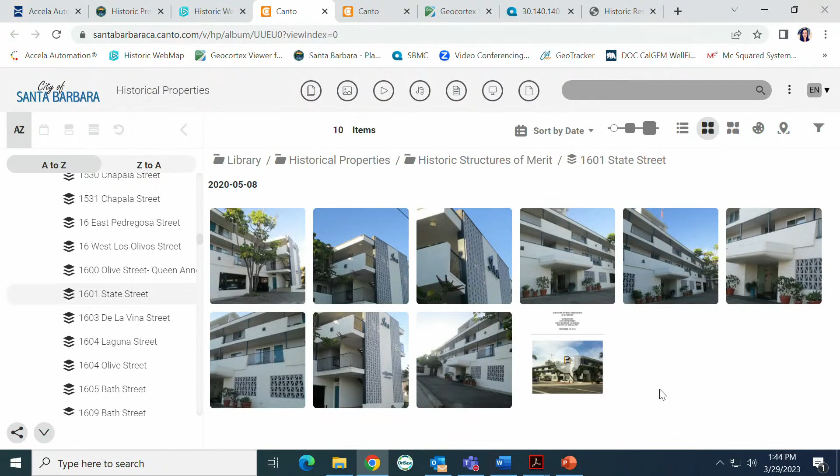Can you point out where that is on the map? It should be right across the street, there, right across the street. Got it. So here's the site, it's one of those El Pueblo Viejo buildings, going in the Mediterranean style with some transitioning styles surrounding it. That building right there, is that the Edwards and Plunkett courtyard building? Yes, I think it was built in 1927.

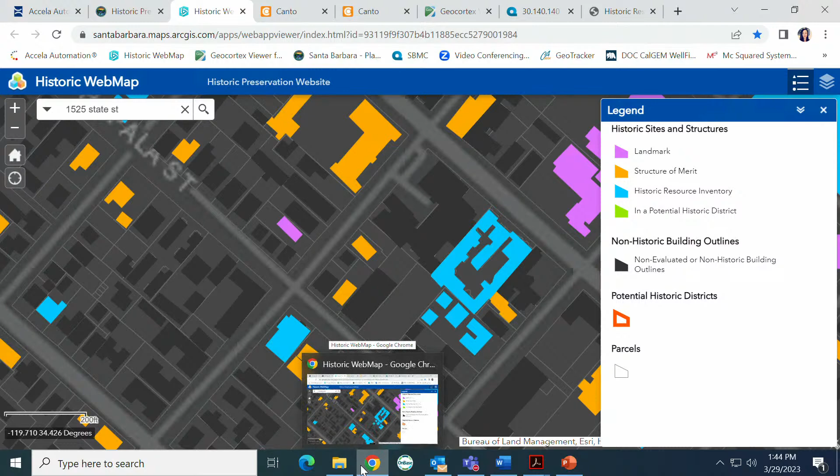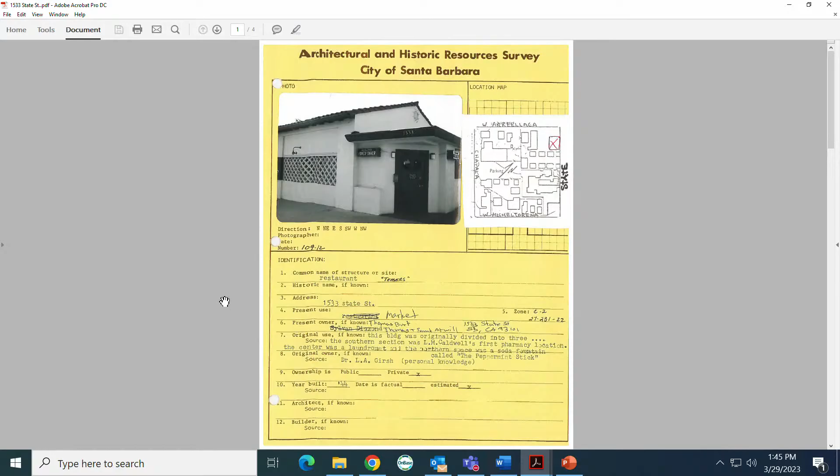We also have, for the applicants and the public, the historic resource design guidelines on infill design that you can use. The Cantwell building itself has been so altered since it was constructed, even since the 1978 survey—this is what it looked like in 1978—it doesn't qualify as historic. So that should set the stage for you on historic concerns. If you have any others, let Heidi know.

May I ask a question? What's that down from the hairdressing salon that was attached to the El Prado? I think it's that hot pink right there. Didn't we have that in front of us? That's the Mid-Century Modern by Lutah Riggs. Yeah, okay, thank you. So you kind of have Mid-Century, Victorian, and Spanish Colonial all on that block. There it is, thank you.

Maybe we should go to the photo board, and I think staff already showed some of the historic structures. The existing site is on the corner of Arrellaga Street and State Street. It is the Cantwell's Market. The current building has 2 one-story buildings there. One is the Cantwell's Market, the other is a one-story commercial project that's currently, I believe, a dance studio, and it's had different tenants over the years. Primarily, most of the site is the parking lot.

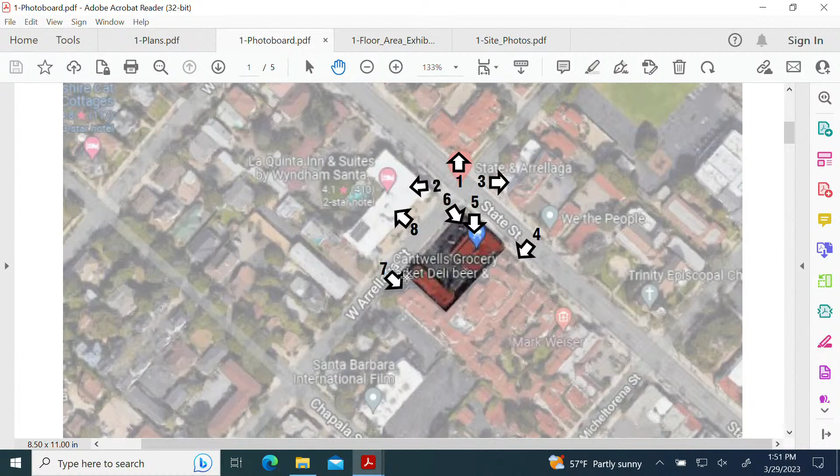There's 2 driveways in and out. As I said, it's right up against the property line. There's 2 buildings, so it's up against the adjacent building that's sort of wrapped around us. The design, maybe we go quickly to the photos that actually show it, and I'll move on to our concept.

So there you can see this is a view of the hotel across the street, the commercial building diagonally across the street, and this shows the Cantwell's Market. It's sort of an interesting building, but due to its configuration, it's shuttered at night. It's not a very street-friendly project as we think a good pedestrian project should be, and that's something we've taken under serious consideration in the design.

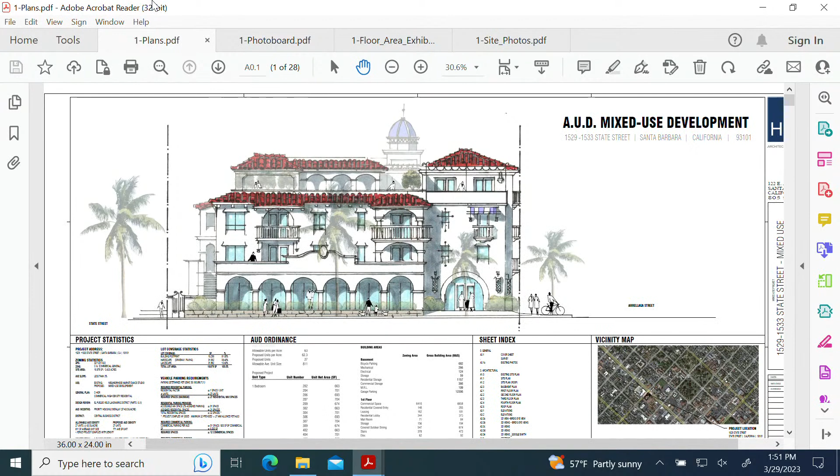We can go maybe now to our site plan, Carl, or even the ground floor plan. All right, I want you to go to the first floor. That's the first floor plan.

So our design, what we felt was very important, and it relates not just to the architecture, but the pedestrian activity in this neighborhood, which goes sort of silent at night, was to have a very pedestrian orientation. We have an 800-plus square foot corner courtyard, and I know because I'm always walking there to Cantwell's, and people are diagonally cutting through the existing parking lot.

We're proposing to move the dining. Right now, there's some outdoor dining, it's almost in the parking lot, except for a little curb stop. It's a little scary sometimes eating there. We propose an arcade that would include some outdoor dining area and enhance the streetscape.

And also, there's an existing sandstone wall. As the State Street slopes down, we are going to continue that existing sandstone wall with the landscaping that Courtney can address to sort of create a little bit of buffer. It's a fine balance between street pedestrian activity and also security issues.

In addition, as we turn the corner along Arrellaga Street, we've set the building back. Right now, there's no landscaping. We have set it back 6 feet with landscaping, and then once again, we have some outdoor arcades. So we're constantly trying to terrace this building back and as best we can create a one-story, very pedestrian-friendly environment. I'll show you later on the elevations at total transparency, arcades, glass openings all around that courtyard, no blocked up walls.

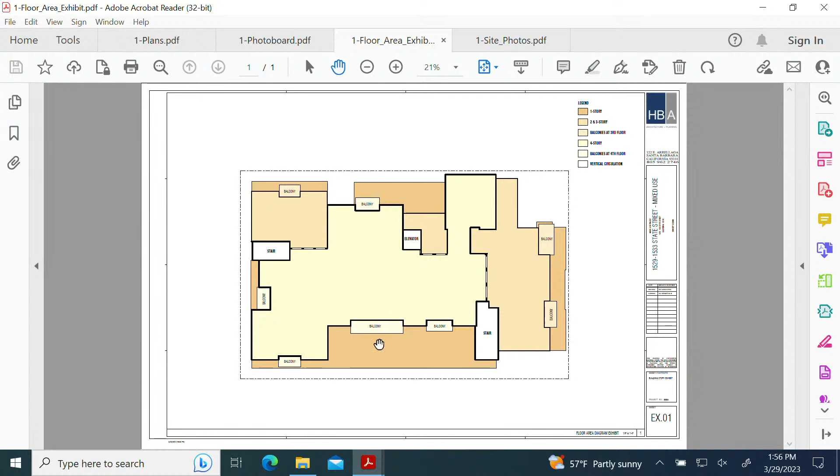We did receive some comments. I know there are people from the neighbors here, and we are going to take that under consideration. I feel there's definitely room for us to work with you to address some of your concerns. We have flexibility within the footprint, and I know Pradeep and Pranav want to be good neighbors - we're really coming in here for the first bit of comments.

If we turn to the elevations - oh, by the way, I want to give Courtney some time at the end because we are improving the landscaping, so I'll go quick. We have landscaping along the edge, let's go to some of the elevations, and the 3D sheet that shows some of the 3D massing views might be best - it shows several views of our preliminary model.

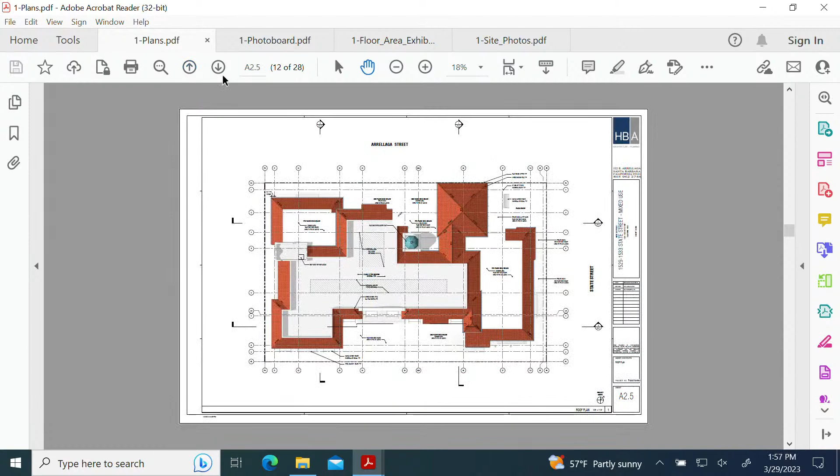You can see here it shows the plaza. What's interesting - our client said let's not just have the sidewalk wrap the plaza, let's bring the pavers all the way out to the corner so it gives it more of a civic public space, not artificially surrounded by the sidewalk. You can see the arcade on the street side, the step back in the building, the rooftop terraces. We kept 3-story elements around this entry courtyard, and you can see where we've stepped it back.

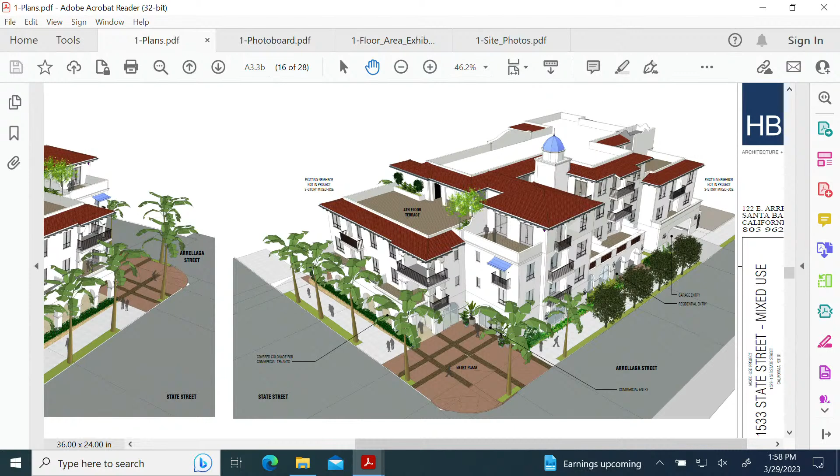I'll let Courtney talk a little about the landscaping, because right now with the parking lot along Arrellaga Street and the boarded up windows, it's not a very pedestrian-friendly environment there. We also have an outdoor tile stair that can come up to the 2nd floor, so there's pedestrian connection, not just through the lobby on Arrellaga Street, but some connectivity along State Street.

As I mentioned, this is early in the process. I'm going to give Courtney a few minutes here to talk about the landscape. As I said, we're here to hear your comments, concerns, questions, so that we can go back to the proverbial drawing board and hopefully come back with a really acceptable response.

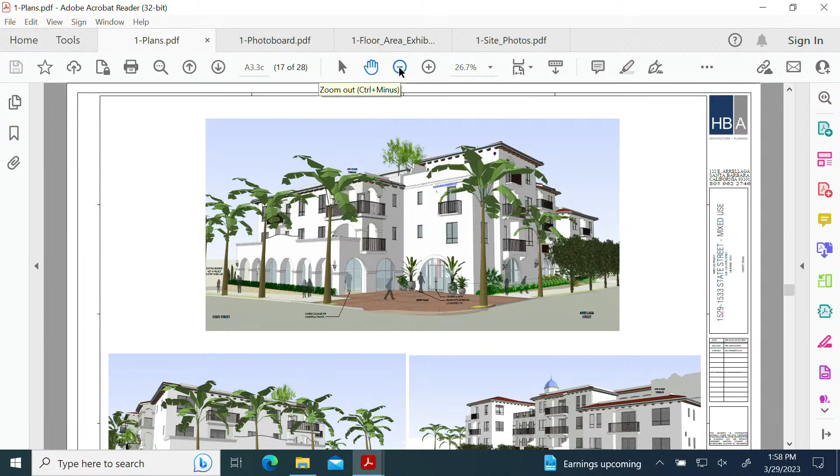If we could go to the tree protection plan, the first page in our sheet. I'll try to be brief. We have, I think, 9 existing trees on the property.

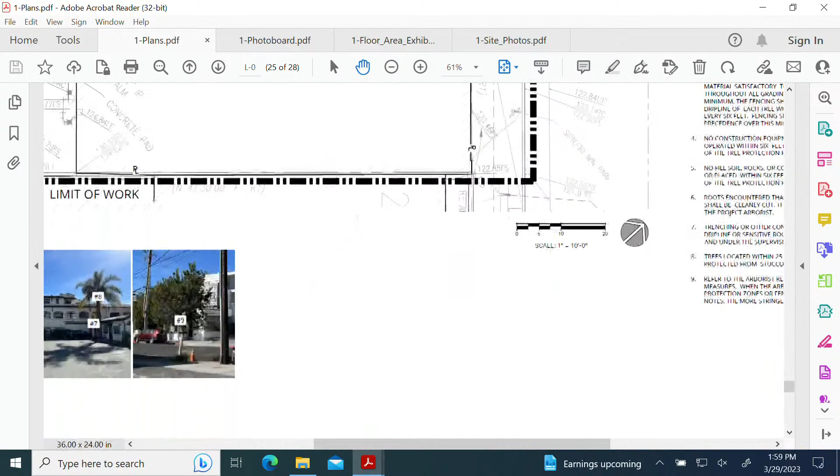Most of them are street trees, so we'll be keeping all of those. There's one pretty poor-looking firewheel currently on Arrellaga that we'll have to remove for our driveway, but otherwise we're keeping all of the street trees and adding new ones along Arrellaga. There are also a few existing queen palms between the buildings, one of which we'll remove, and the other two we're hoping to relocate. They're quite nice, maybe 12 feet tall or so.

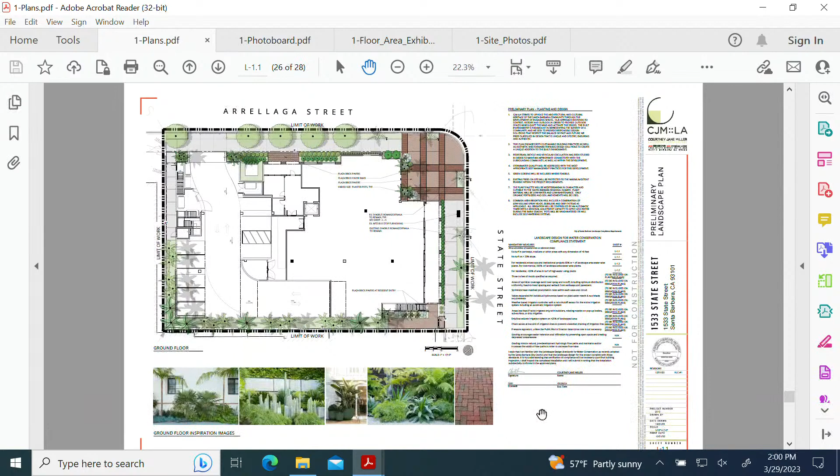Next page. As Jay mentioned, we're really happy about the amount of space we have on the corner there, so we're trying to pull in different brick patterning and keep it open and friendly, leading people into the front door. Since this part of the property is over structure, instead of raised planters we liked the idea of having a massive group of pots. We have some imagery at the bottom that speaks to that, though not quite exactly. Around the south and west sides of the building we have about 10 feet between the building and the property line, and within that space we're hoping to have a lot of layering with different palm trees and narrow, taller tree species to help address the adjacency with the neighbors.

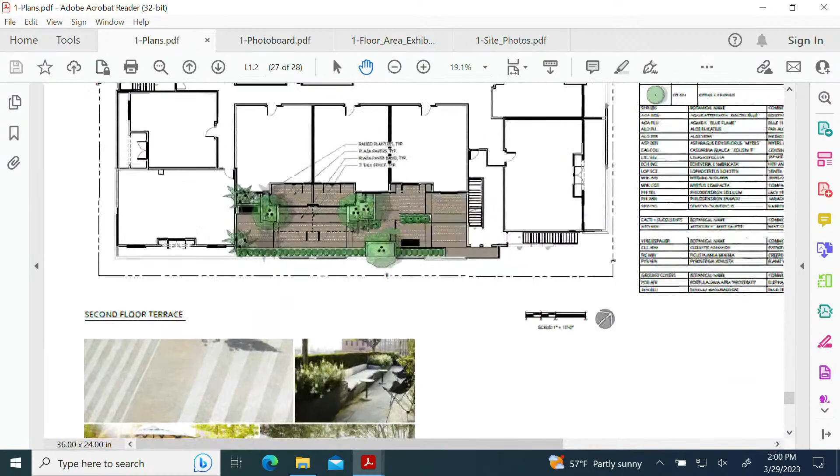Next page. Second floor terrace—this is a fun one. We kind of have a different personality for each terrace on the different floors. This one we wanted to feel a lot more like a garden, so the idea is to wrap it with hedges along the south property line and have built-in planters. These are mostly private areas on this floor.

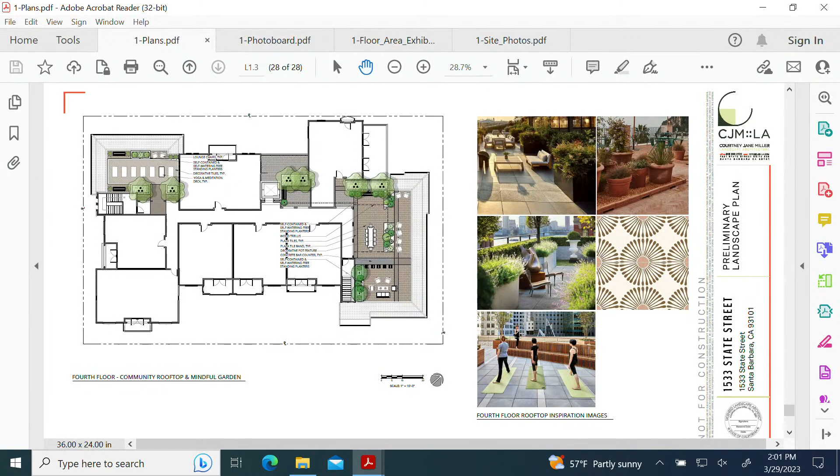Next page. Fourth floor—we have our community terrace plan overlooking State Street, and we have some space to work with there, so we're hoping this really feels like a community space. We have a communal table and various ideas around seating. The terrace on the upper left-hand side we're hoping will be more like a space for mindfulness, a quieter space—so yoga, just kind of a beautiful garden setting.

And I think that concludes my part of the presentation. If there's anything else, I look forward to your comments. I guess I have a minute 30 to go.

As far as the architectural articulation, as I said, we want to use traditional arcades and archways on the ground floor. We're still evolving the design, but the concept is to have a very traditional building within the guidelines in terms of the balconies, the wrought iron work, the tile work. Around the entry courtyard we maintained it at 3 stories, and we think there's an opportunity there not to be symmetrical, but to have a more playful articulation of the facade.

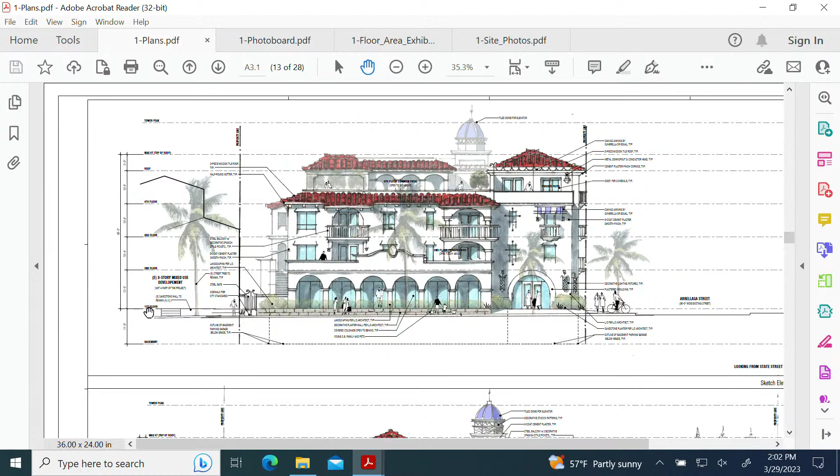On the upper floor, what you're seeing on the top floor, that arcade is strictly just a walkway to get to the exit stair. It's set back 30 feet, so in reality lots of this would not be visible from eye level. And there you can see that's a stone wall that's really an extension of the existing stone wall that continues down State Street.

The rear of the building—right now the Cantwell's building is right up against the property line, so that's primarily parking in the back. Rather than building right up on the property line, where right now there's trash enclosures and some mechanical things, we do want to work with Courtney to create a much nicer landscape perimeter around this building, not property line to property line.

You can see here, once again, the 3D showing the stepping and the breakup. We didn't want a box. Obviously as a trade-off we do have some portions that are 4 stories, but we had the ability to work within that massing to move things around a bit, and we think we did a good job of keeping it more to the center of the site as opposed to on the perimeter.

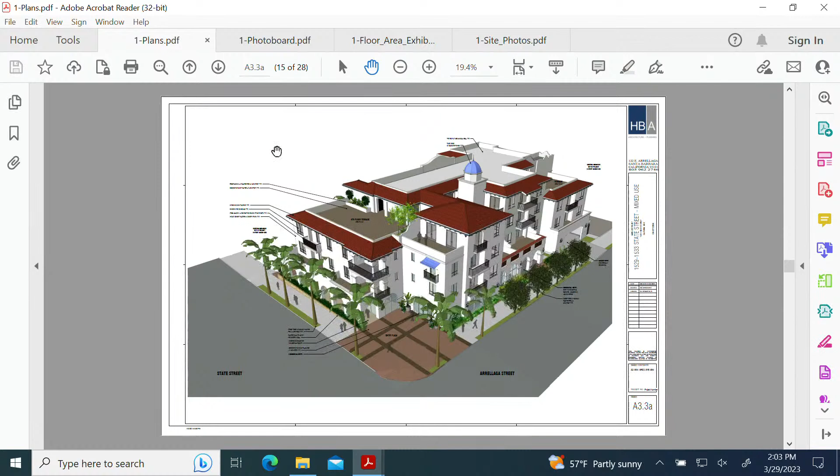As I said, I know the site very well—I come there quite a bit—and Cantwell's is committed to staying there. They're a very iconic local business and they want to continue operation and just make it a more improved, safer setting, something that's part of the neighborhood that they're sort of living and working in. So I'll close it at that.

All right, Commissioner, thank you. Chairman Grumbine, I should say.

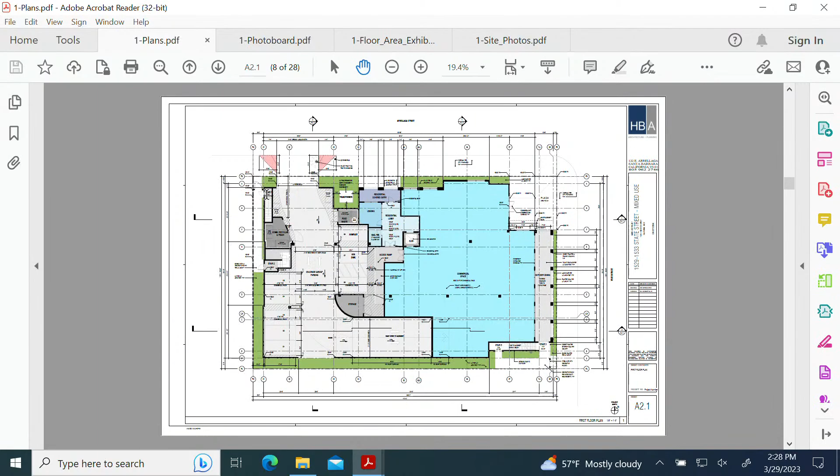Commissioner, I'll have to look at that, that's a transportation review, but yeah, it is usually at the property line back. It makes sense, because the point is to protect pedestrians. And I know there were comments from transportation, so we asked the applicant not to revise their plans in whole before coming to you, because the idea is that the comments they get from the PRT and from your commission are then digested to either take straight to Planning Commission or, if they choose, to redesign. So I don't know that all of those have been addressed. I'll look right now for their comments. Thank you.

Okay, other questions? Yes, Commissioner Jordan? I have a question about landscaping and about the slot between your building and 1525. That would be, what, the west side on the plan? What are we calling it? South side, I think. South side. Okay, south.

My question has to do with the viability of that as a landscaping area at all. How much light is that going to get on a typical day? Along the south property line there, how much light? I don't know exactly, but it's a tall building on both sides. It's a narrow, deep slot. So my question deals with, is there going to be enough light for landscaping?

Yes, absolutely, especially since we're on the south side of the building, we'll be getting the most sun there than we would anywhere. But 1525 is immediately adjacent, right? Yes.

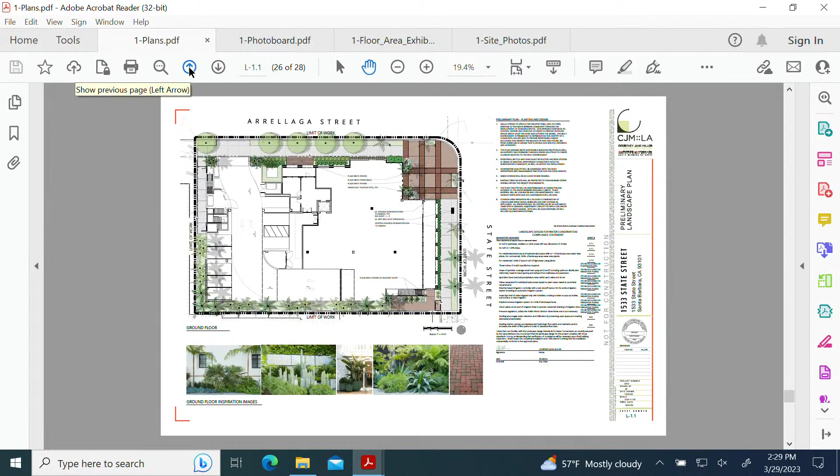One thing I do want to address with that comment is, once we get above that first floor, we've stepped the building back 28 feet. So I think you can see now, granted that's not south-facing, but when we worked with Courtney, we did take into consideration that we're pushing everything back 28 feet from the property line. So the wall you see on the landscape plan is only the ground floor portion for that major section of the building, and we do have other step backs. But I'm not a landscape architect, so I'm not qualified to say how that would affect the plants.

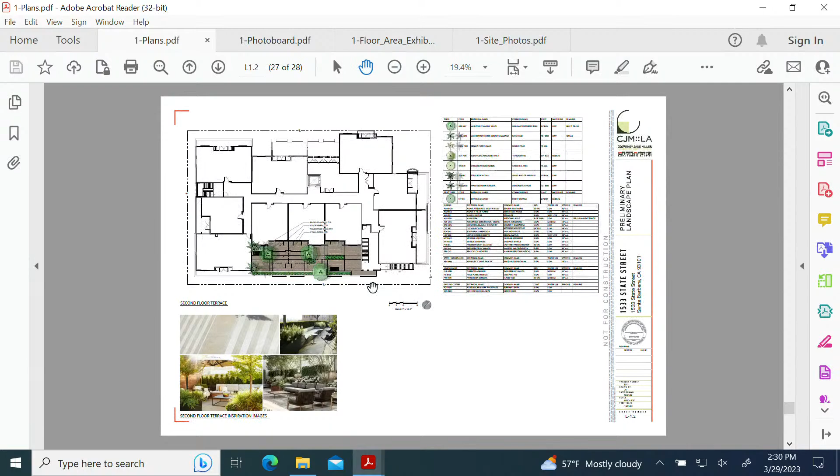Other questions? Would you show the overall site plan that shows the adjoining buildings? I think you have one, you saw you flip by it. We can bring that up, sure. There, I think that's the best one there.

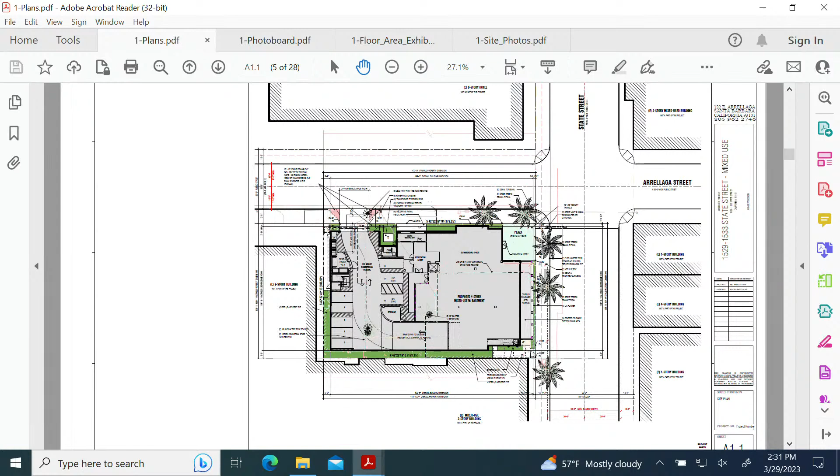I do want to point out, Commissioner Lenvick, that this is the ground floor plan again, so it doesn't show the upper sections where we pulled it back. One of the requirements of submittal is that adjoining properties and their improvements be shown on a plan so that we have a good understanding of the relationship. I think when you come back, it'd be good to have that plan showing the adjoining buildings.

Check with the city's zoning department, planning department, they have handouts on the requirements for submittal. The same is true for the exterior elevations. You have some nice exterior elevations, but you don't show them in the context of the adjoining buildings, and I think it would be helpful for us to see that. Yeah, we'd be happy to do that. Thank you, that's a good suggestion for the streetscape elevation on State and Arrellaga. Not a problem. Any other questions before we jump into comments?

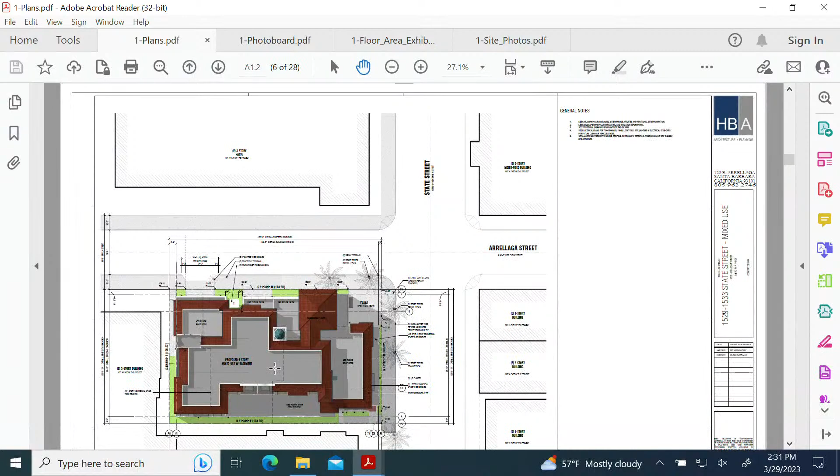All right, I had one. Pardon my interruption, Mr. Chair. Cass Ensberg did submit some questions that she wanted voiced at the hearing. I don't know if you would like to read them out, or I can go through those, and then I'll have one more as well. Okay, so...

One question was where is Cantwell's area imagined, and I think you went through that, at least in the ground floor one: outdoor connection between Cantwell's and the outdoor dining. You talked about it being in the arcade, correct me if I'm wrong on any of these. No, you're correct, we just haven't articulated which doors. We haven't laid out the interior, but there'll be plenty of connectivity. Gotcha. Yeah, there.

A2.2 and 2.4 are corridors, non-corridor spaces, and the courtyard roof deck number 2, accessed through the arched openings. No doors are indicated, so I think you touched on that too. You're going to be developing it.

A2.4, the privacy deck is shared by 2 units, 405 and 408. Is that shared by 2 units? I think currently it is, and we haven't really finalized the design of that deck yet.

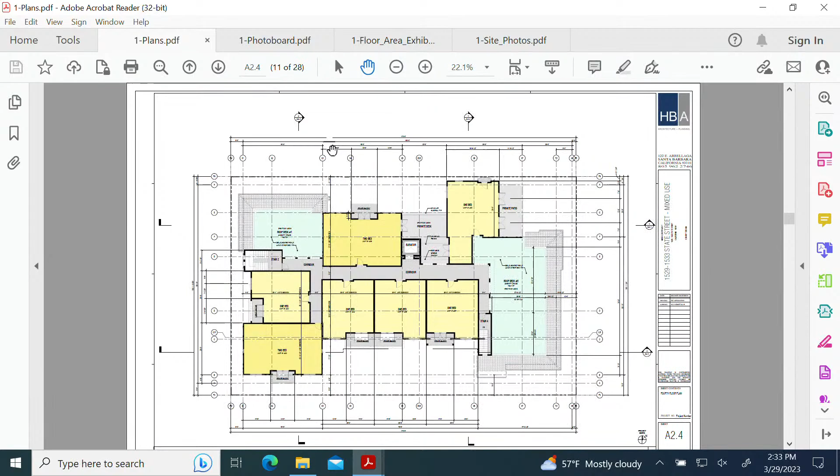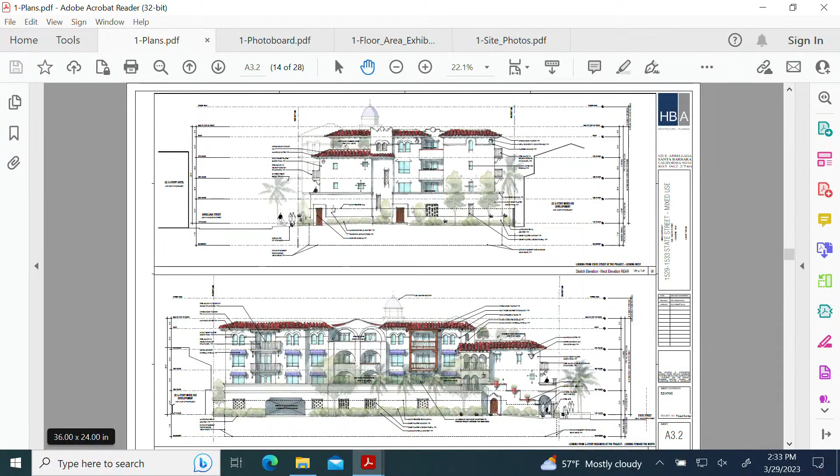A3.2, is it clear that although the adjacent building says mixed use, it is only mixed use at the State Street side, and this portion is all 2-story residential with a parking garage below? So are they separate buildings? I guess they may have separate addresses, so we viewed it as one L-shaped building, but it could very well be true that the commercial portion's only on State Street. Gotcha. And then is solar panels planned for this building?

Yes, we definitely are bringing up conduit and inverter connection points, and we've shown that on the roof. Our client is very committed to doing the solar, not just the potential tap, and wants to include the solar as part of his energy and sustainability commitment for the project. Okay, great.

And then I had a question, speaking of solar, the solar ordinance, have you looked at that? And if so, what have you found that your building is doing on the solar ordinance side of things? So, Chair Grumbine, the solar ordinance only applies in residential zone districts, so commercial zone districts, it doesn't apply, which this is. Have you done any solar studies of what the shadows are that you'll be casting?

No, we've not done a detailed solar ordinance study. Primarily, most of our shadows are going to be cast to the north, but we'll look at that as we continue to try to work through some issues with our neighbors next door. Okay, regardless of the ordinance, we'll try to work with them.

All right, any other questions? All right, why don't we go into comments. This is for comments only, and we might want to have a general discussion, or just kind of march through, and I'll try to record some of this as well, having a general discussion since they're here for the first time seeing us, and what are some of the things that we want to see, what we're liking and not liking, and see if we can come up with some general directions. So who wants to kick us off?

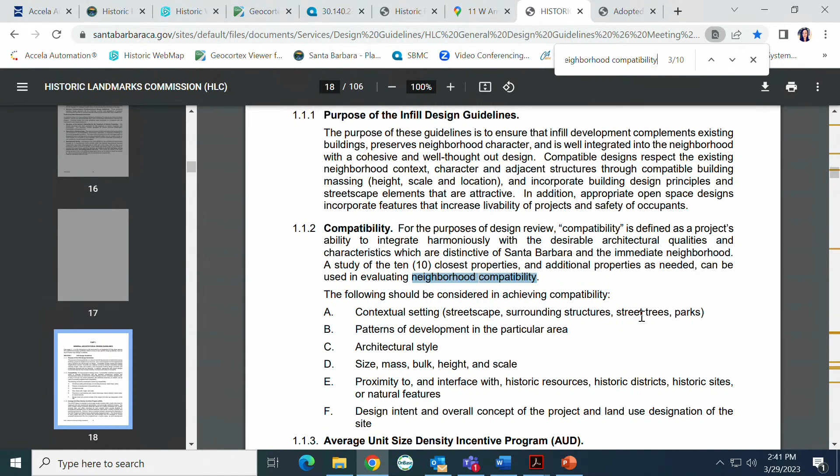It mentions compatibility, and we always have a problem with that. But our guidelines state, for the purpose of design review, compatibility is defined as a project's ability to integrate harmoniously with the desirable architectural qualities and characteristics which are distinctive of Santa Barbara and the immediate neighborhood. And it goes on - it talks about studies, and you show the 10 closest buildings, and so on. You can read that and get that information.

With regard to average unit size density incentive program, it talks about how the city wants to encourage smaller housing units, locating housing units close to transit, so on and so forth. It talks about that. And we respect that. It goes on to say, however, there is a balance between advancing the objectives of the AUD program and approving an appropriately designed project. The characteristics of each project site and its context and surroundings must be evaluated to ensure proposed development fits into the neighborhood. This is the city telling us this, and of course you're aware of that.

And finally, the city must make deliberative findings and fully explain how all project compatibility criteria have been evaluated. And I think it would be good to have that compatibility criteria, which is referenced in our agenda, before us now almost, so that we know what we have to do to approve this or any project. Right now, I can read the compatibility findings, but I'm not going to. But I think it's important that we all have them.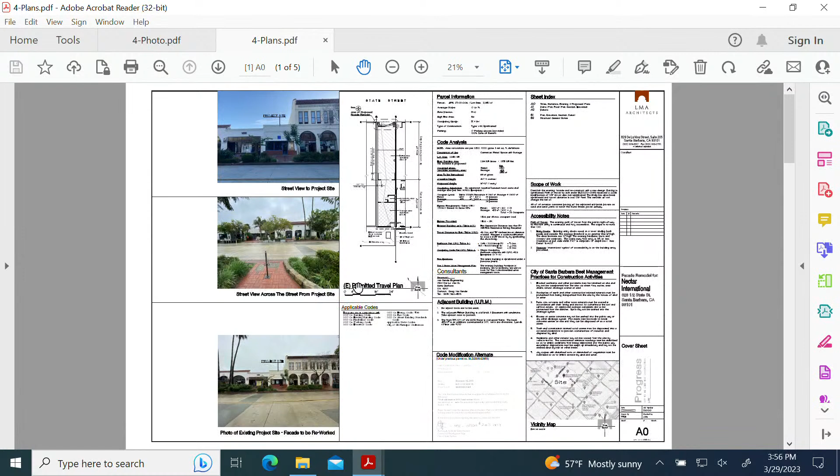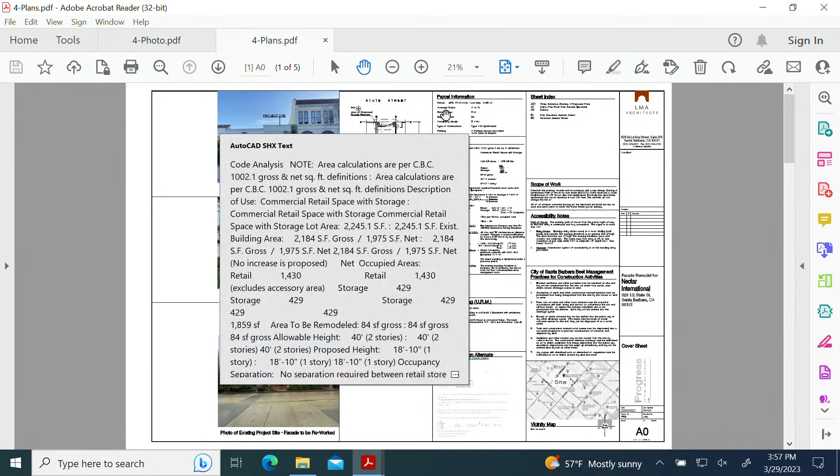I believe I've covered all of those. Let's see if I can go to the next set of drawings. You can click down, or use the arrow... yeah, that one there. No, left, to the left of that. There we go, just above there, that down arrow, yeah, that one, there we go.

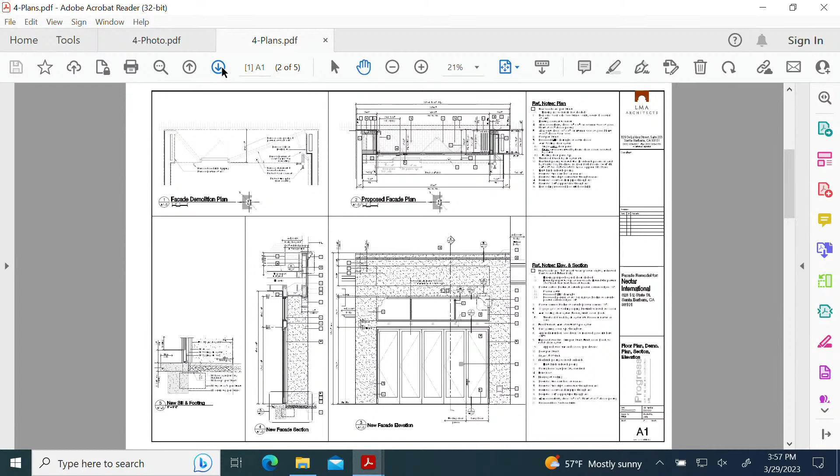You've seen all of this. The lower left-hand detail shows the State Street brick that will extend under the threshold door for the exterior. Currently it's just red-colored, broken-up concrete, so that was one of the comments I'd planned on addressing anyway. Another comment was to add a little more elaboration to the cornice detail, which I've done here, shown in these details.

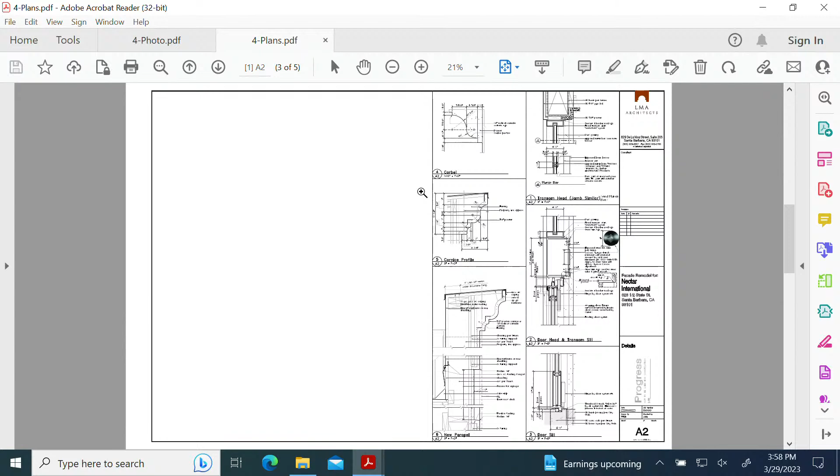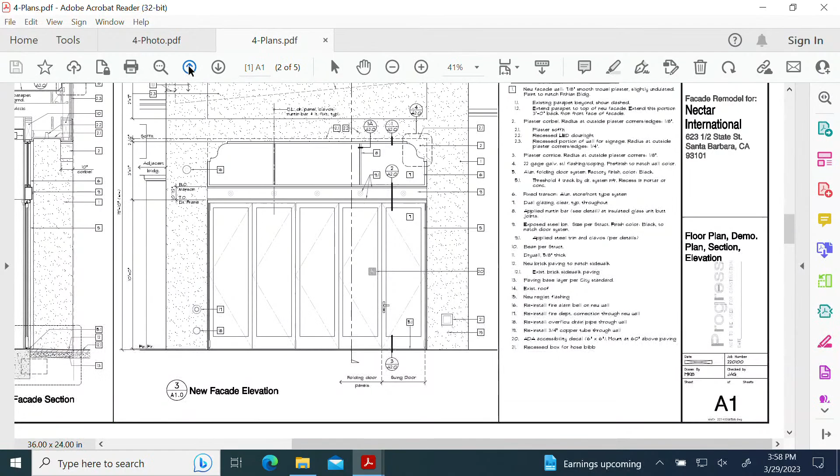If you want to enlarge one, just hit the Z key and draw a marquee around what you want to enlarge. In particular, detail 5 and 6. So I press Z, then draw a box around it, click and drag with left click. You can actually use the mouse. Yeah, I'm used to a mouse, sorry. There you go, perfect. The scroll wheel will help you go up and back, and down. Okay, let's do it this way, we'll walk it over there.

Okay, that was our plan. In the elevation, you can see the cornice molding detail here. Another subject that came up was the added mullions to the window transom above, which you can see here. And in the details on the transom, I came across some clavos that I wanted to add for a little more traditional detail.

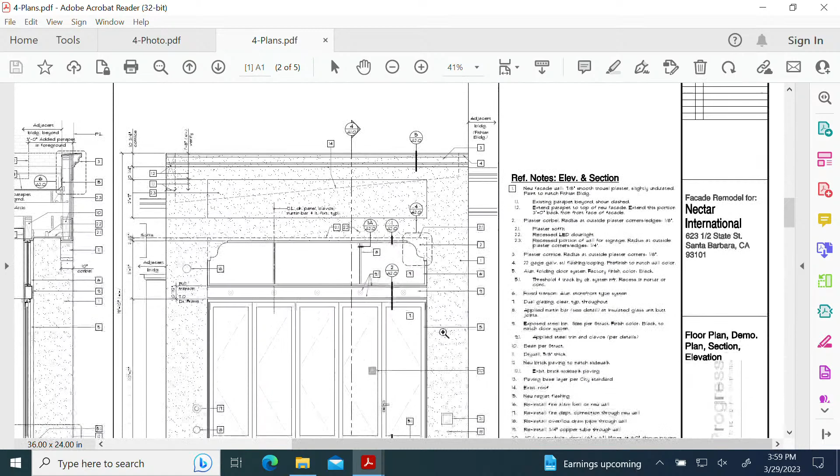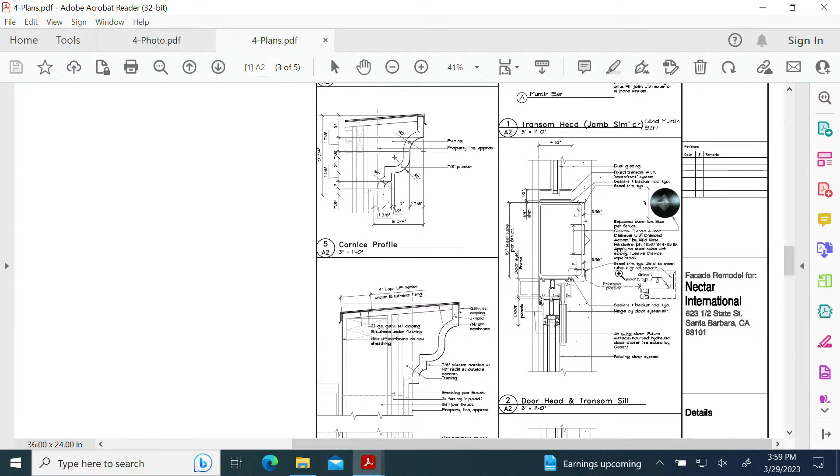And here are the details 5 and 6 of that cornice molding. So there's that. And let's see, up here in the upper right, 1A2, this is the clavos detail that I came across that's about 4 inches in diameter. I think it'd be simple, but add a little traditional elegance to that transom. And I think that's what we had.

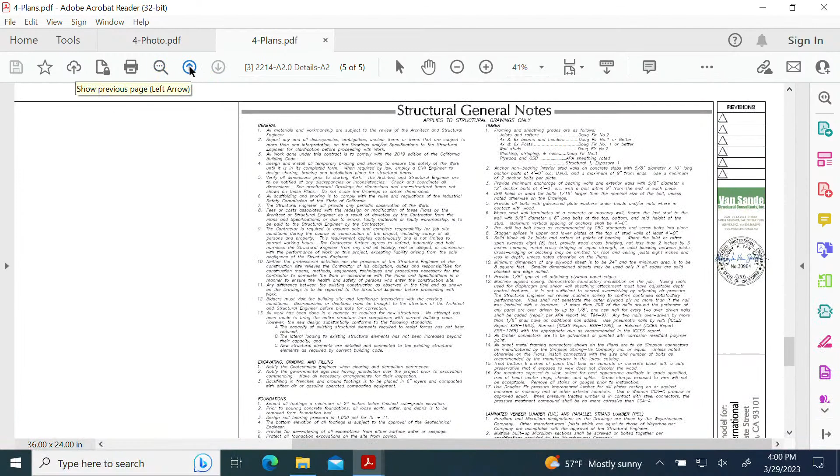Sections, you're probably not interested in this, this is all the structure. No, we like structure too. Do you? Okay, it has to stand out. Well, a more structured life. Let me read some of these general notes then.

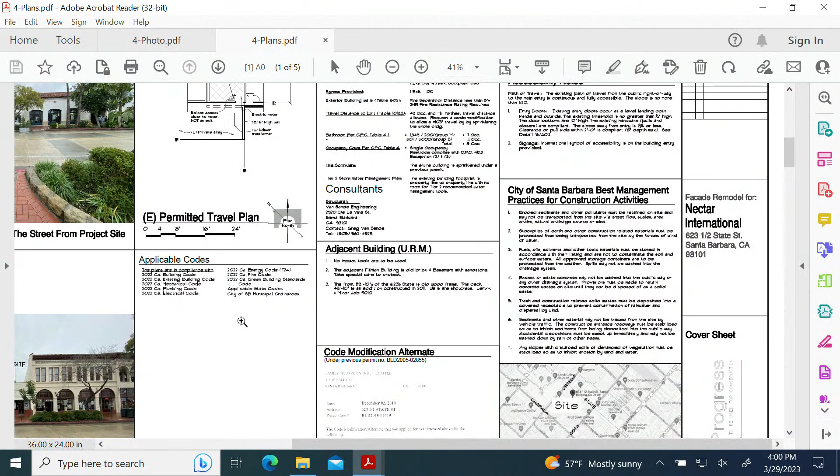We're shallow, okay. Let's get back to the elevation. Well, let me go all the way back then to the photographs. Now how do I, let's see... You can also use the plus and minus buttons to zoom out of the page. Okay, well, at the top, here we go, there we go, that's the one I wanted.

Okay, so the colors: the storefront system is going to be black, satin finish, and the color finish on the plaster we're calling to match the Fithian building next door. And that's my presentation.

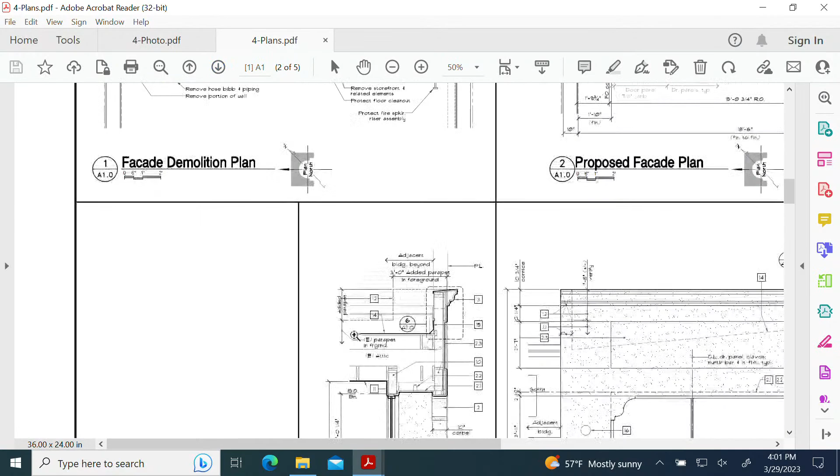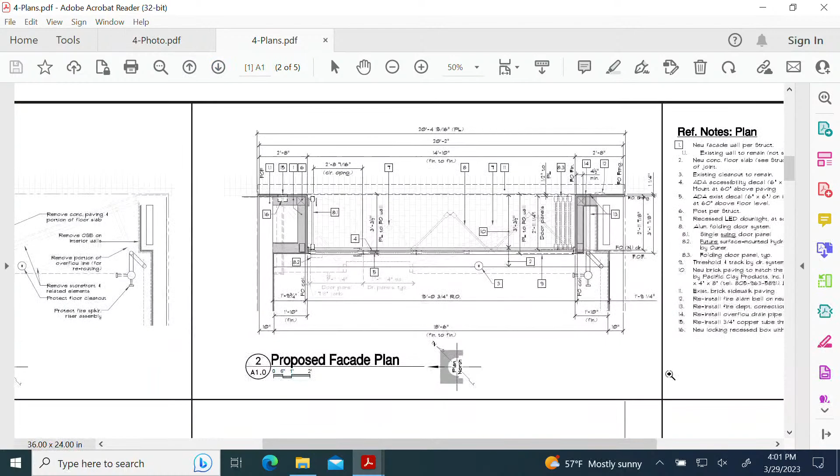Do you have the black doors and windows called out somewhere? I do, they're on the elevation, let's see. Just my elevations. They call them out here on the cover sheet, maybe. I got to see where Mike called those out. I think he did it on the cover sheet. Should be a keynote there, I would think. Did you see it? Yeah, on the page, there was a note 8 on the door.

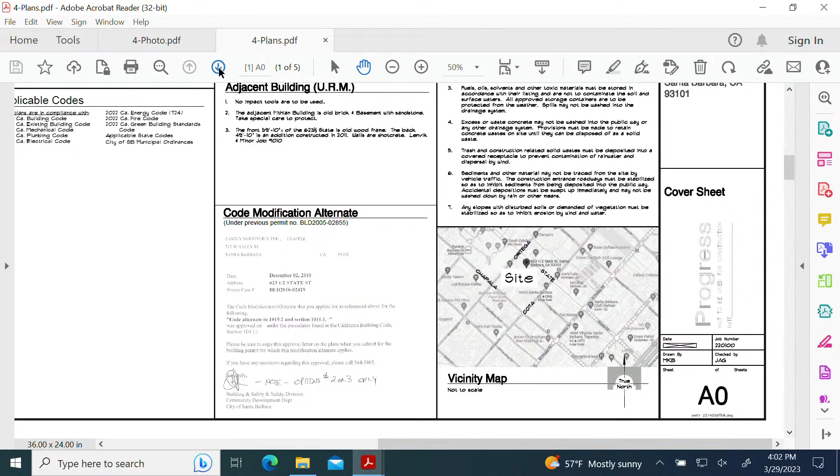If you hit H, it'll turn into a hand and you can drag it around. If you hit H? Oh, there we go, it's a hand and you can drag it around. Oh, God. If they were paper, we would have the last 10 minutes of our life back. You and me both. We lobbied for digital for a long time, now we want analog.

Okay, so note 8 on the aluminum door is calling that out, factory finish, color black. It says right there. Okay, it's got that one, great. Don't ask any more questions. Somewhere there's a note about the Fithian building color too, so.

Okay, great. Does that conclude your presentation? Yeah. All right, thank you.

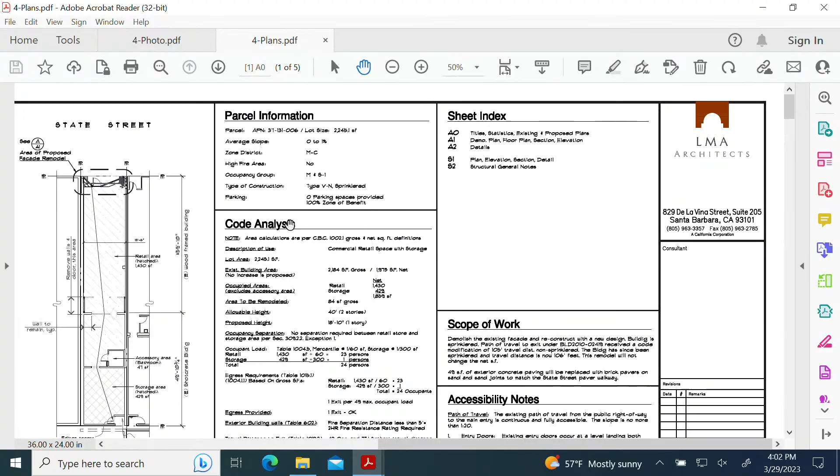All right, so now let's go to public comment. There's no member of the public in the room, so any member in space? Thank you, Chair Grumbine, I do not have anyone participating virtually, and we did not receive any written correspondence, so back to the commission.

All right, thank you. To the commission for any questions. Any questions? No questions. Easy, all right. Any comments, discussions, et cetera?

I think it's great. I think it's very supportable. Is that a motion? Yes. Second. What are we doing? Final project, PDA and final approval. Okay, and second by, oh, me. All right, second by Vice Chair House. We don't have a litany of conditions where we have to run through compatibility, this, that, and the other thing. There we go.

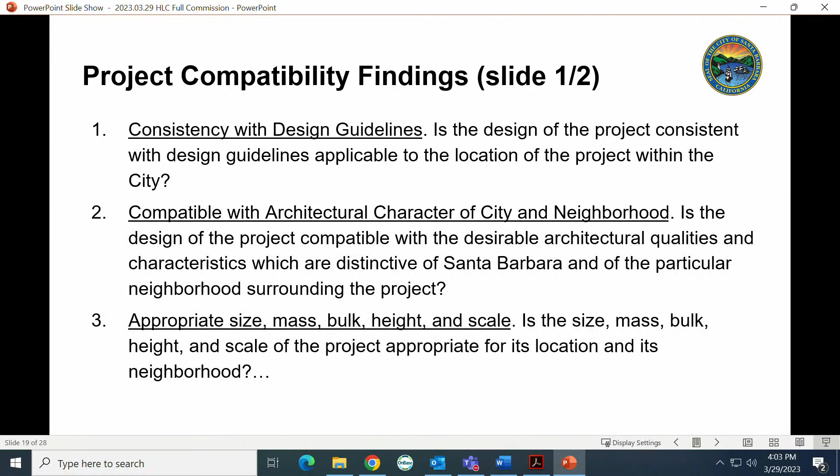I'll make a motion for project design approval and final approval. It is consistent with our guidelines. It is compatible with the neighborhood. It is of appropriate size, mass, bulk, height, and scale. It is sensitive to the buildings next to it, most of which are historic resources. Public views of ocean and mountain are not impacted. And the little open space that it has is going to be compatible with the sidewalk next to it.

All right, and the seconder concurs. So that's the next one. All right, under discussion, any discussion? All right, can we have a roll call vote, please?

Thank you, Chair Grumbine, I'll take the roll call vote. Commissioner Butler, yes. Commissioner Lenvik, yes. Commissioner Uli, yes. Commissioner Dorden, yes. Commissioner Drury, yes. Vice Chair House, yes. And Chair Grumbine, aye. Motion passes.